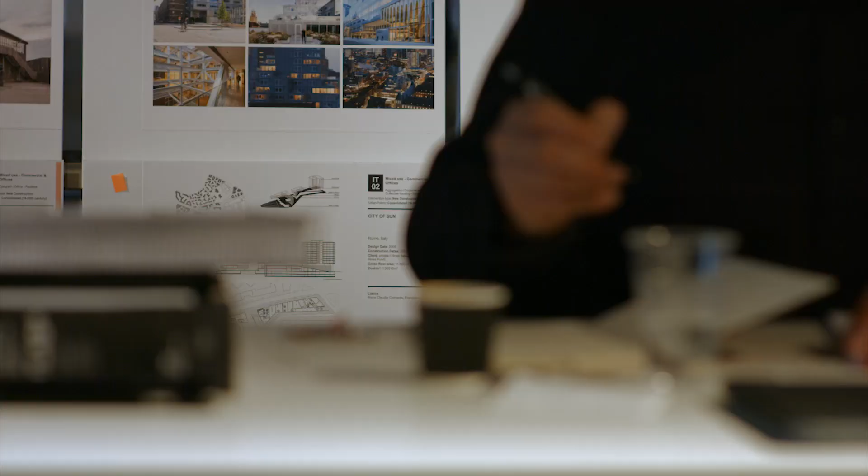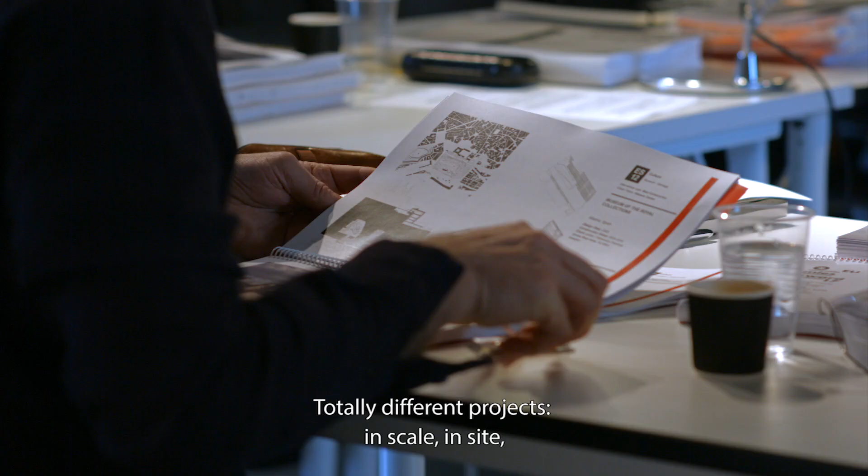What do I expect? A big, complicated task ahead of us. It is very, very intense. It's a lot of work, very different opinions and different ways of looking at these works. Totally different projects in scale, in site, even different social problematics.

Each edition of the prize, there's a different jury, a total of 7 people, which come from different backgrounds. There are some strong characters, of course. There will no doubt be disagreement. I am convinced there will be a rich debate, and I think that is perhaps the reason we're all here, because we each have a responsibility beyond ourselves in this prize.

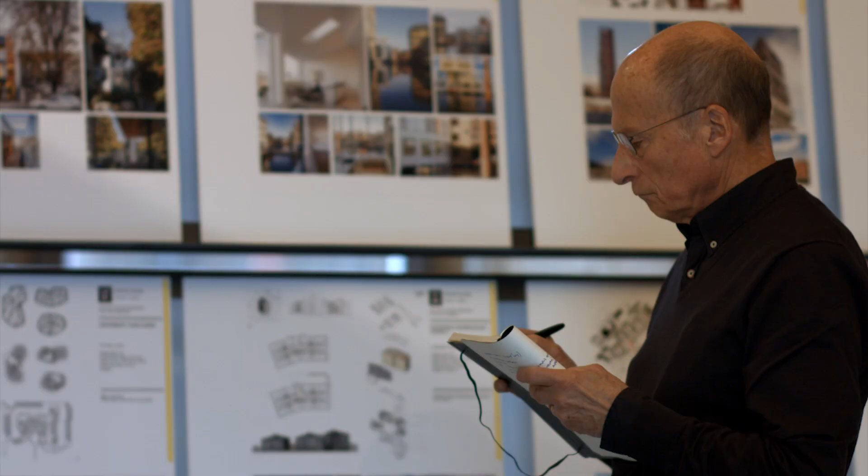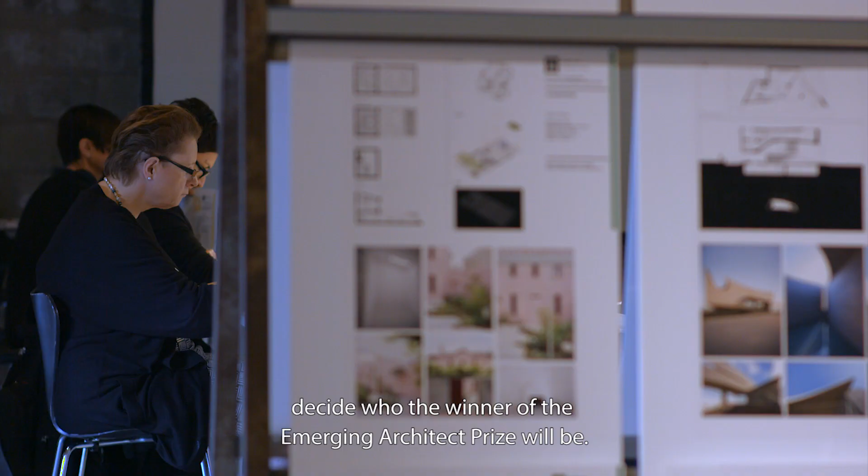Some of us are focused on the social problems and social environment of the buildings. Another group is more focused on form and compatibility of building to the surrounding area. The main issue during 3 days is to reduce that list of 355 to 40 works, and from these 40 works, decide who the winner of the Emerging Architect Prize will be. And then the final point will be to reach the 5 finalists, and the 5 finalists will be the ones that will be visited, and after visiting them, discussing which one should be awarded the prize.

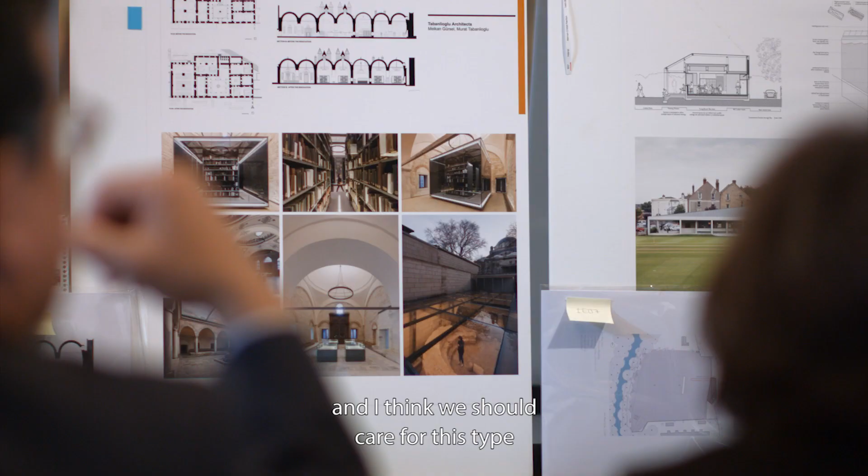The person who voted spends 1 minute saying why they think it's good, and then we vote. Very strong piece of concrete architecture right near the highway for something that nobody cares for, and I think we should care for this type of everyday architecture out there in the industrial realm. Those 4, it's gone. Yeah, this is the only way.

We can also recognize already what is typical and significant for architects in Europe now. The question is how far we can make the final judgment showing really the best exemplification of this trend.

It is an artistic project more than really an architecture intervention. I mean, I would say that that's also a very artistic project. I do think it's a great interior space. It is great acoustics. You are transported by the music in it.

I wanted to support the romanticism of public space in a rough part of town. I love it because these people are dreaming of geometric and other rules of architecture of the 70s, and they're looking back at our immediate past. It's quite disturbing, and it's quite challenging, and it's fresh, and it's exciting.

Those who would like to make it one of the 40, put their hand up now. Great. Phew. I love it. It's great. Next one.

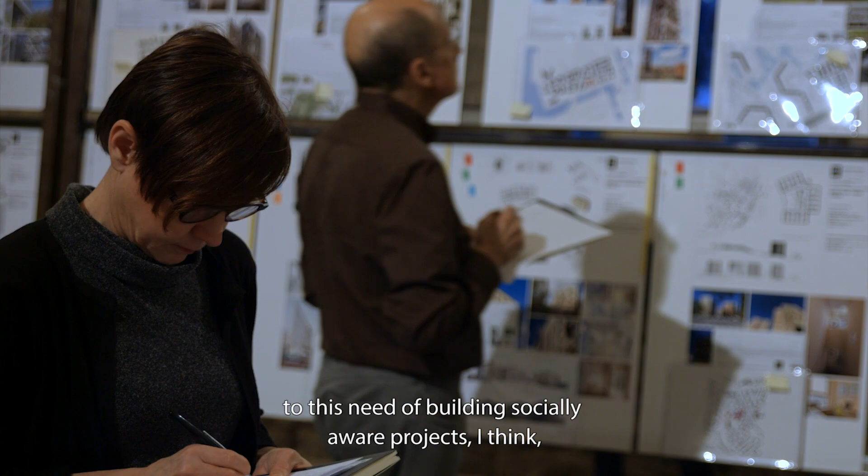Within the work of this younger generation that is now included in the 40, you can see that there is a stronger attention to this need of building socially aware projects, I think.

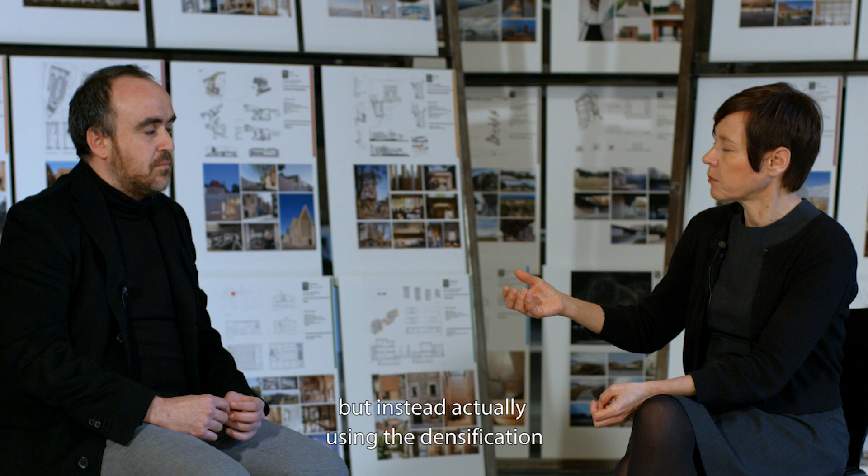I have a strong belief in the European city and its sustainability, its potential to grow via reform as opposed to sort of whole-scale change. How we can densify our cities without losing the kind of livability of them, but instead actually using the densification to improve the livability of the city.

The city is becoming dangerously a potential mosaic of social ghettos. It's a political issue, a social issue, but it's also for sure an architectural, very important issue.

The artistry of composition is something that I would regard as something to judge when it comes to a young, good architect. And the area of work in which architects choose to work. When I see a young architect trying to do something like social housing, that gets me going.

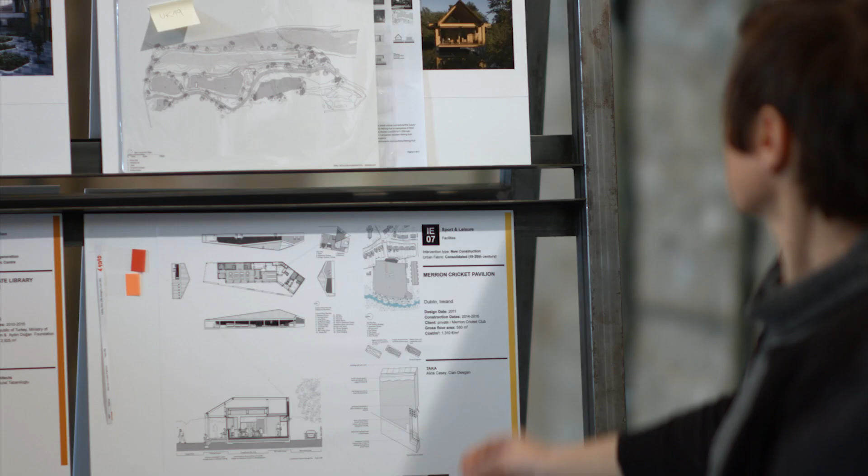We are championing the traditional idea of social housing through the Emerging Architect project.

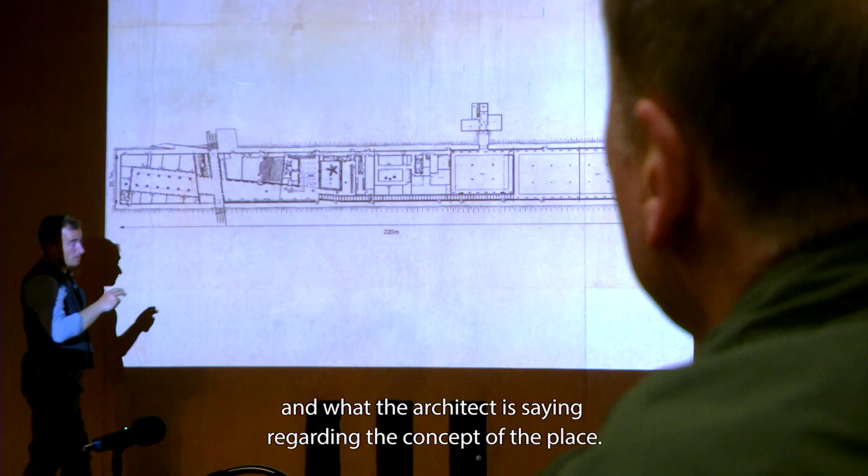This looks like a tough traveling every night in a different hotel. Nowadays it's quite important to really visit the works because photography can be manipulated. Now we really have the chance to meet the users and hear their experience and see by ourselves how the project performs and what the architect is saying regarding the concept of the place. We will be finished in 4 days, and the last day, on Wednesday, the decision will be made in London.

I haven't seen a building like this before. It takes the essence of what was here before. I think it's modern and old at the same time. It's a very delicate place to place a building in Ribe because it's neighbor to the cathedral, to the procession walk, to the old jail.

Time presence in this building - it's brand new, but it's really the pattern. It's also contemporary and it's building the foundation for whatever happens after. The building is a direct response to the major challenge of this project, which was how to integrate a 1,000-year-old ruin in a new contemporary building that has to contain functions for a modern parish home.

Somehow they enlarge the space around the church because by lifting that building and keeping that ground surface, keeping on working, somehow they enlarge it. I'm very impressed with how it gets connected with the church, and I think it adds a great domesticity to the square.

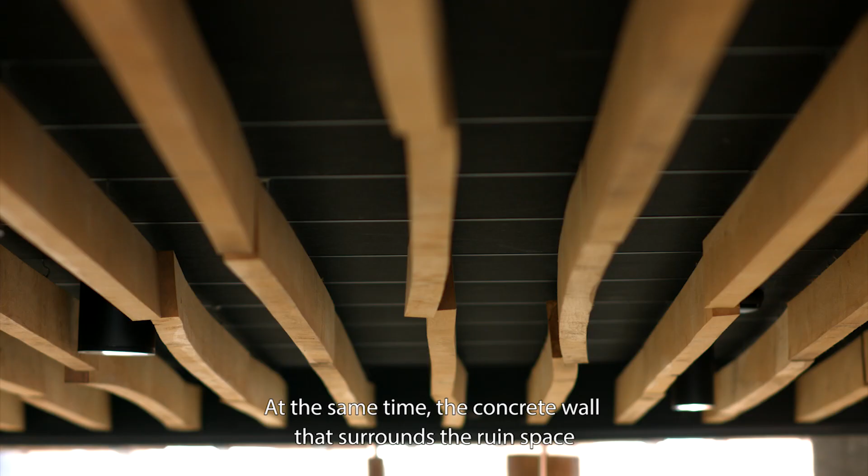At the same time, the concrete wall that surrounds the ruin space is made with the help of a wooden-faced scaffolding wall to fill in the concrete. We told the workers, hey, you have to cut the pieces of wood not precisely. We want to make gaps between the wood so that the concrete will bleed through the wood and give it a sensual texture.

Inside is really introverted, and that is a quality. The best part of that project is the office floor and also the floor for the lecture hall. I have never seen a building like that, and I've never seen interiors like that, especially not public interiors.

We have this dictatorship of white interiors, and this is the opposite. If you want an argument for color, that place is an argument for color.

What impressed me was the arrangement of windows in the room that from the facade I felt could look a bit mannered, and yet were absolutely convincing on the interior.

The windows are a result of a series of punches through this mass of brick. So it's a kind of a contradiction. It's a brick building that is hovering above the ground, like defying gravity, and this brick building is made very heavy with these punching holes.

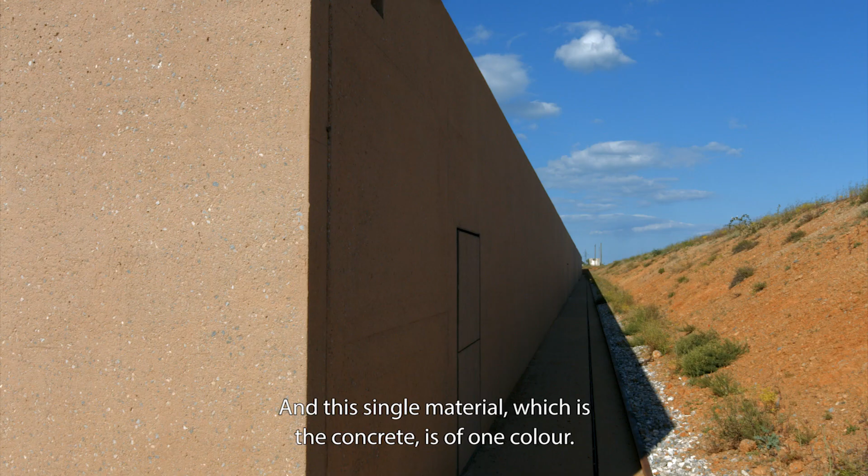The most impressive parts of it was the silence, the big landscape and the big piece. It looks like its weight is sinking into the ground, and that gave an incredibly strong first impression.

This approach that the architects had selected to do outside as little as possible, but still to make a clear intervention, and actually a very strong one. Because only a strong gesture could talk.

You don't know what you're going to expect when you go through that ramp. Quand on descend la rampe d'accès, on sent bien, et c'est une des forces de l'architecture, notre corps est accompagné. On va dans la terre, on accède à quelque chose de nous-mêmes qui est aussi enfoui.

The architecture has no artificial effect, it's kind of rough, it's there. Every architectural intervention had to do with the monolithic qualities, like where's the water, where's the technique, where are the air conditioning holes, where's everything. They are all gone, which is a great achievement.

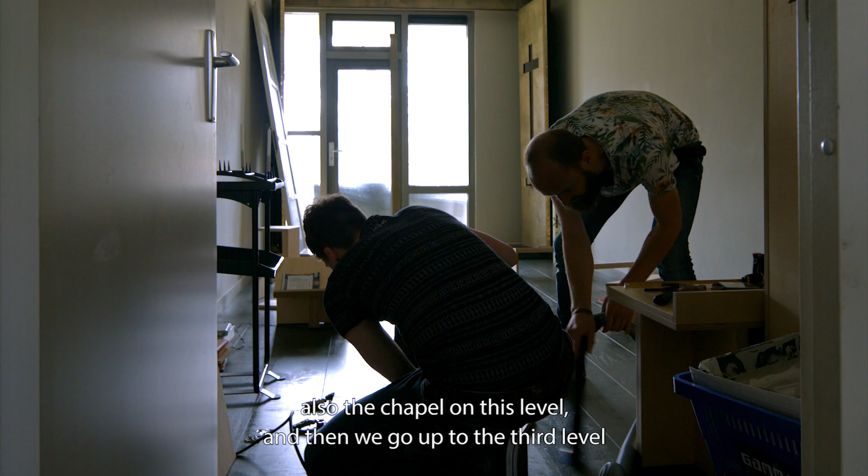Beneath, it will become a social shop, and on this level there's the neighborhood room and also the chapel. Then we go up to the 3rd level, which is also the top of the T, and we live there on the left and right side. The homes where we live are separate, but we are connected via the balcony.

Living in the city itself is unaffordable. Many people came with the same vision to this project: to have a flat that is entirely empty, but where you can build all the things you want. Affordable housing on an incredibly large scale—this happened at the moment of greatest depression in the market.

The various uses of the ground floor—I was touched, I should say. There was no good relationship with the ground, you could say, because the ground floor was entirely occupied with storage spaces. We moved all the storage spaces to the floors above, so we could make housing and small commercial spaces on the ground floor.

One of the main things we also did was take out some external elevators which were on the corners. They blocked the view, they were ugly. We took them out and replaced them with new elevators inside the existing cores, next to the existing elevator, which then exposed again the beautiful horizontalness of this structure.

Acting on 2 or 3 very small things, in a very inexpensive way, puts together a complex of arguments that I think are very important and very relevant today, and finally a very European issue.

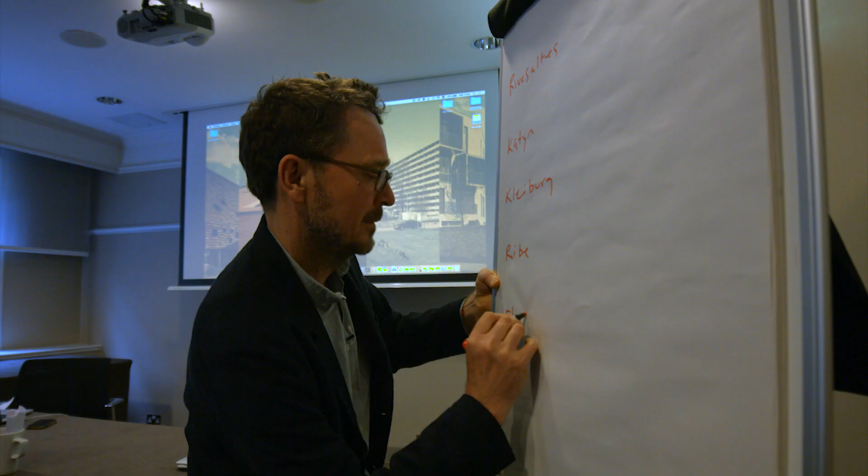First position for the Flat Kleiburg. We have a winner, and we can be very proud. Congratulations.